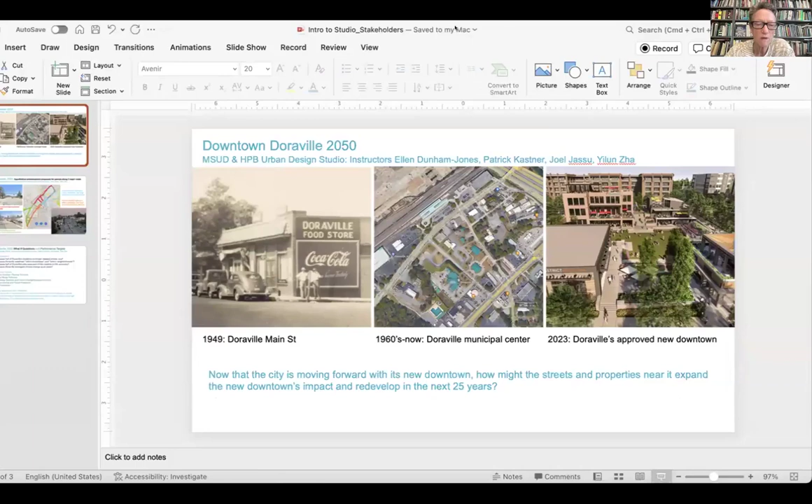We're really looking at downtown Doraville and how it's changed. And you've seen the photo before of what the old Main Street used to look like. You know what your downtown kind of looks like in the middle there now, the municipal center. And I assume all of you are familiar with the plans for the new downtown that are really much more urban, have more attention to gathering spaces, much more sustainable.

And so the question that we are really asking is, now that the city is moving forward with a new downtown, how might the streets and properties near it expand the new downtown's impact, frankly, expand its visibility? I think the new downtown plan is terrific, but it really doesn't have a presence on Buford Highway or on New Peachtree Road. You know, how might redevelopment around it in the next 25 years just further expand, improve, do all sorts of great things for Doraville.

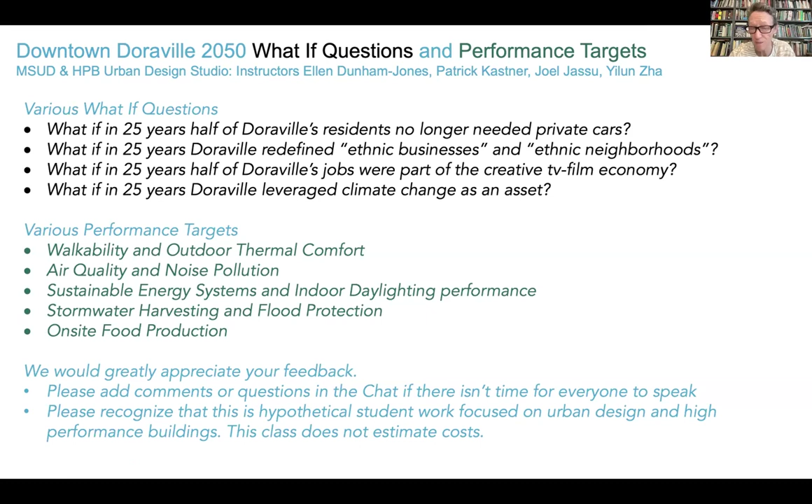This class does not estimate costs. This is not a real estate development class. The students are familiar; they've taken a class in real estate development, but in this class that's not the focus, and there just isn't time in one semester to get into all of the financial and all of the practical things. We've tried to find a balance between being bold but at the same time not unrealistic. So you'll have to let us know what you think.

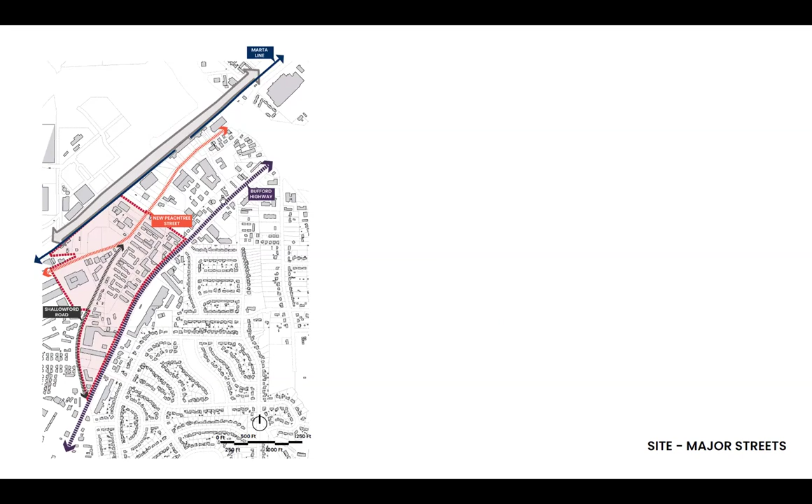Yeah, hi everyone. My name is Raj. I have Toshi and Chinmay presenting with me. So the site that we are working on is to the south of Doraville, which is the Peachtree Road. So first we identified three major streets. We have a MARTA line which goes to this site. We also have railway. So on the east we have the Buford, we have Chamblee Tucker... Shallowford and New Peachtree.

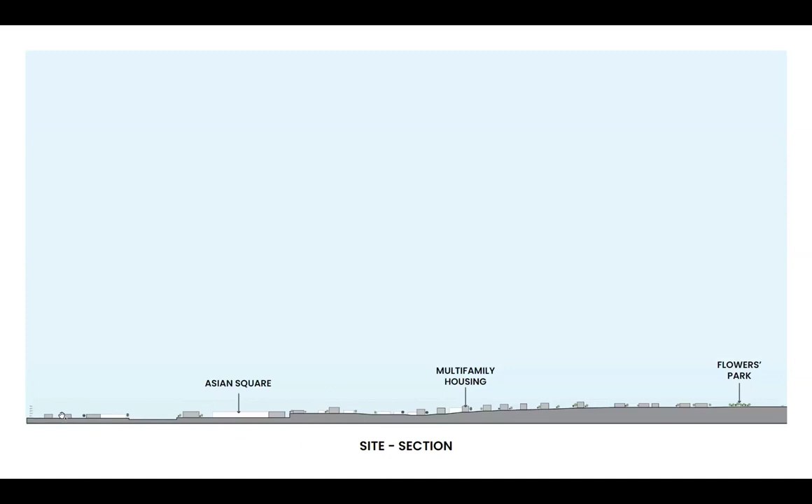We also identified important landmarks on site. That is the new downtown development, the elementary school, Asian Square. This was the site section where we realized there was a lot of topography. There's a difference of around 50 feet from Asian Square to Flowers Park. So the question that we are trying to answer is, what if in 25 years, half of Doraville's population no longer needed private cars? So we started listing how we can promote walking as a preferred mode of transportation.

Some things that we identified were better pedestrian infrastructure, a variety of mixed-use amenities to give people a reason to walk, more transportation options, green spaces, affordable housing. At the same time, some of the issues that we identified on site were that there was no connection from the Buford to the Shallowford. There were a lot of vacant lots on site, and there were no active uses or active programs on site. Also, a lot of accidents happen on site, and a lot of jaywalking happens on this side because there is no sidewalk.

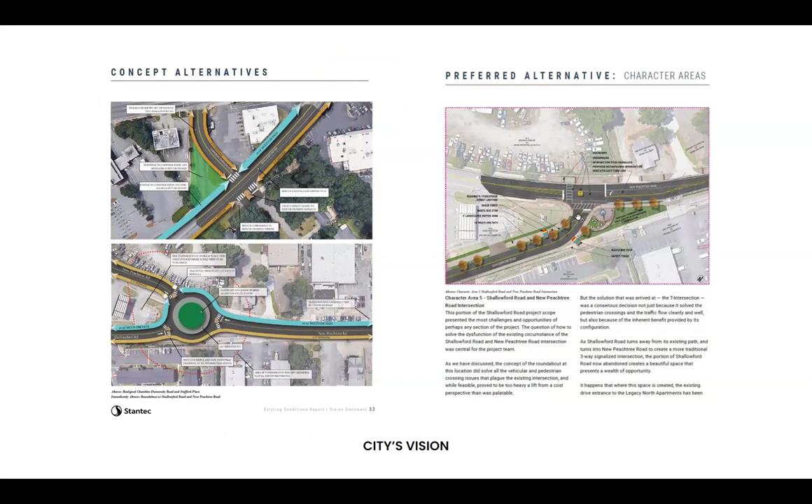And the city's vision, where the Peachtree and the Shallowford meet, I think the city is also imagining figuring out a junction as well. So to answer these questions, we started coming up with our urban design strategies. Like Raj said, we identified these three major axes on our site: Buford, Shallowford, and Peachtree. First, the strategy was to connect the axis of the Shallowford leading to the New Peachtree, connecting to the northern part, that is the MARTA station and the downtown.

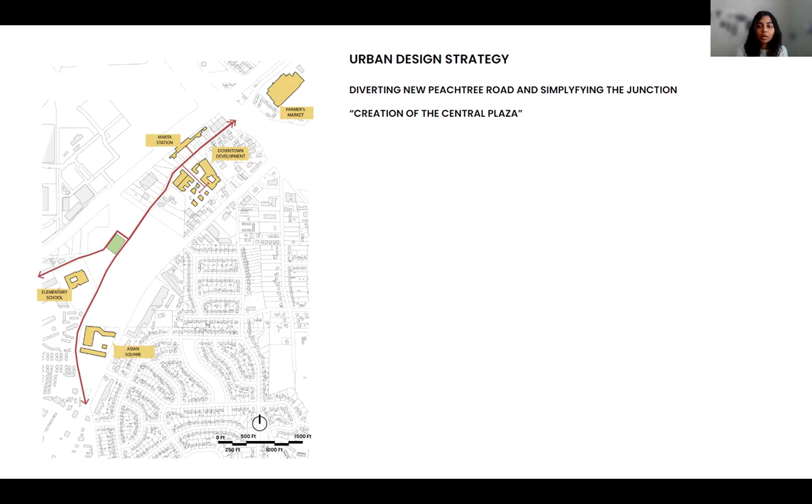The second strategy was to continue the axis of the New Peachtree. Like Raj said earlier, the junction where the New Peachtree and Shallowford meet was a complicated junction. So to simplify that, one of the strategies we came up with was diverting that axis, which led us to the creation of this central plaza, the central, highly public space for the city.

The third one was the two major public places on our site, the Asian Square and the Flowers Park. Although we know the Flowers Park is going to go away, according to the ULI they are trying to reimagine the park. So we thought it would be a great idea to have some sort of physical connection or a spine connecting these two major points of the site. And another was looking at how we can break these larger blocks and have some sort of secondary connection.

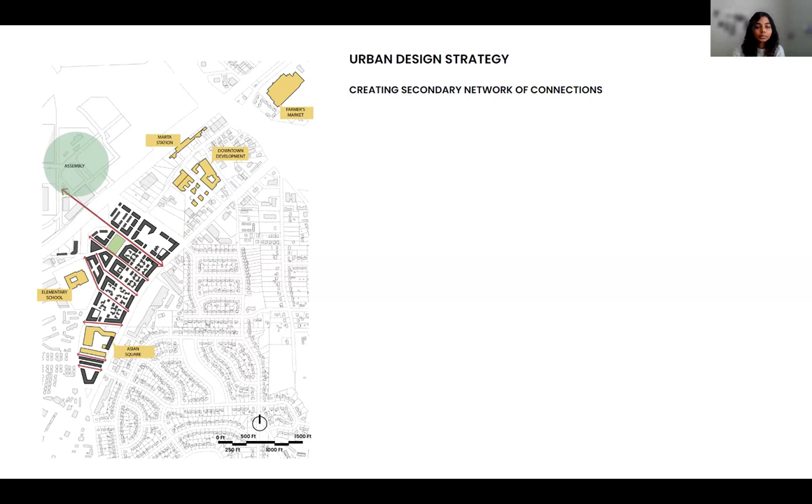Okay, you're halfway through your time. Yeah, yeah, move quickly.

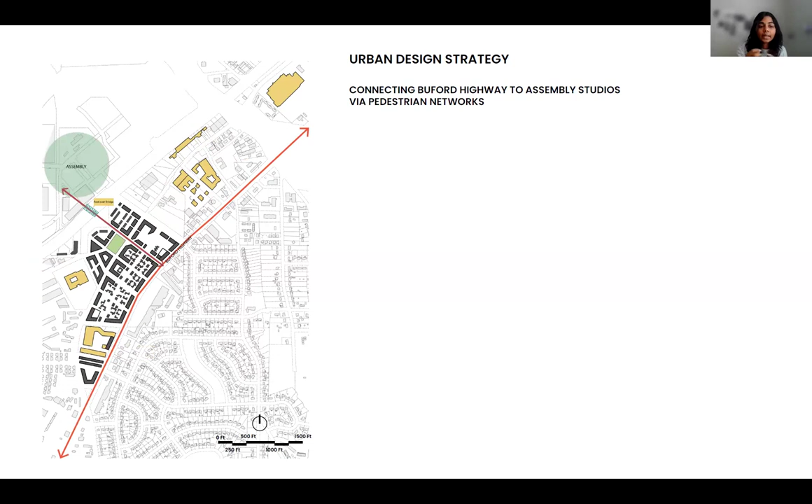So this was again how the New Peachtree could come together, and we could establish connections from the Assembly to the downtown. Another one was how we can connect Buford to the Assembly. So we thought of coming up with foot over bridges or some sort of physical connections that can extend from the site to the other part of the plot.

One of the things we were targeting was the what-if scenario after 25 years, how we can make it more car free. So after 25 years, we envisioned having autonomous pods, sort of AVs that could run on the entire site.

We established certain points where these could have stops for the public, like the gateway, the Asian Square. We also have an elementary school on the site, the central plaza, and the Flowers Park. So our autonomous vehicles and other micro mobilities can run throughout the site.

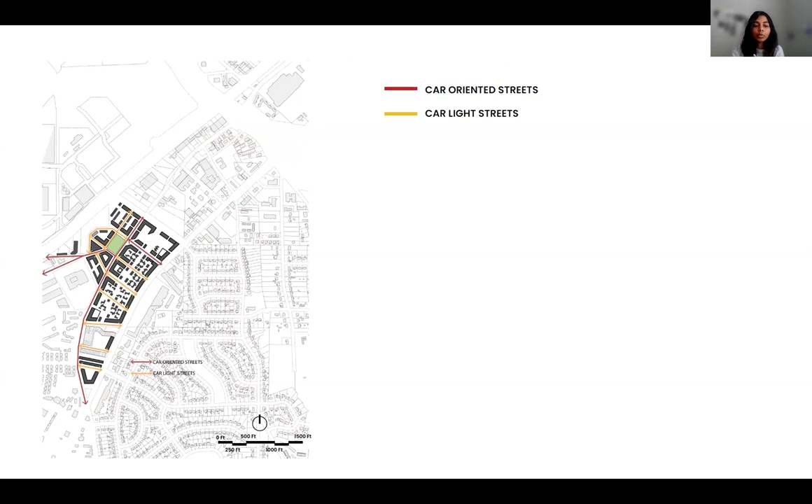We looked at how we can divide these streets into car-oriented streets, trying to limit the car-oriented ones as much as we can. One axis was Shallowford, the second was car-light streets—how we can not do away completely with cars, but have certain accesses for micro mobilities. So those could be car-light, and eventually all the other zones could become car-free zones.

This street leading from the Asian Square to the Flowers Park would be a completely car-free street. To make the pedestrian walkability more pleasurable, we thought of having a bioswale that runs along our site.

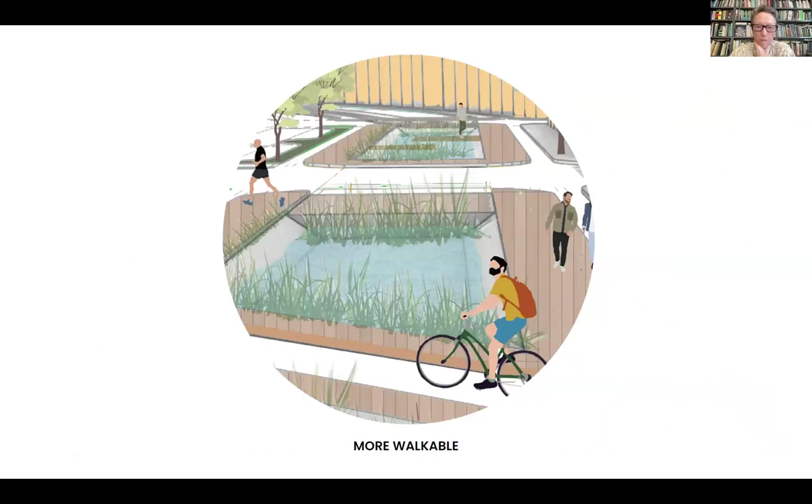We were looking at how we can make our neighborhood more walkable and bikeable, as well as more connected in terms of all these micro mobilities. This was just the land use plan, mixed use combined with single family housing, and these are all the amenities laid out on our site.

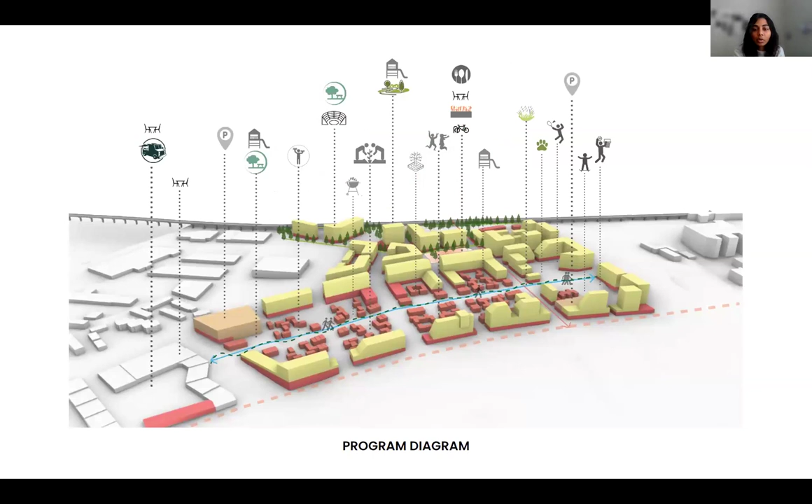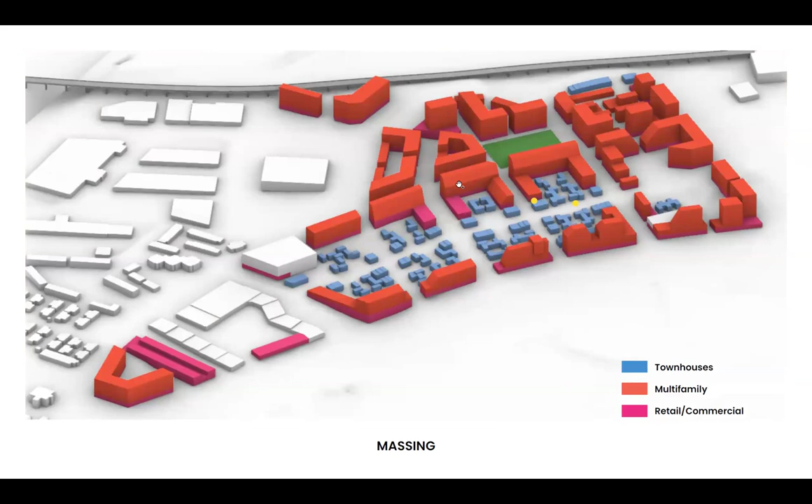We'll just run through the massing options. We have higher density on Buford and Shallowford, but lower density inside the neighborhood. We were exploring how we can emphasize the plaza that we were talking about.

I think it's important to say that your neighborhood in the middle of the block is a car-free neighborhood—no parking for those units in the middle. Let's just jump to Chiang Mai.

As we have the car-free neighborhood, one important thing is the urban heat island effect that happens due to cityscapes right now, due to all the concrete. So we moved ahead and saw how the shadow patterns are along the New Peachtree Road, let's say Buford Road, and found we can have our central plaza covered with trees.

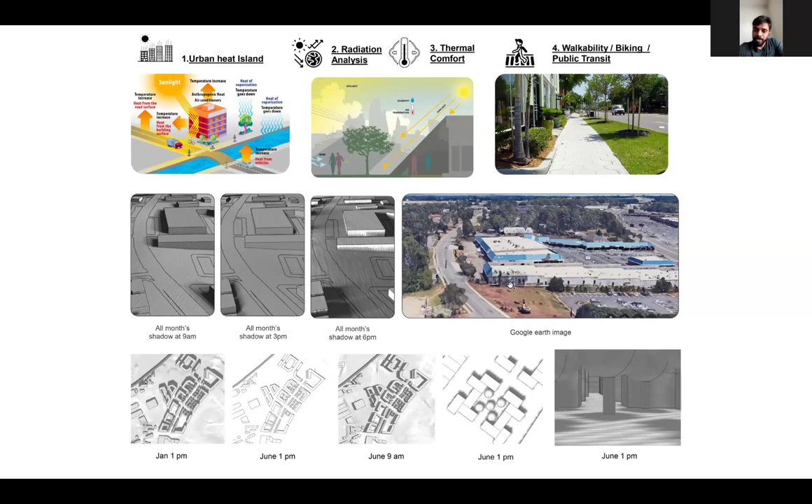We also studied the solar radiation affecting the site. These are images showing a few places on our site that are very much exposed to sun, which are not comfortable while walking, so we're trying to mitigate that with various design options coming forward soon. We also studied how internal areas or rooms are affected by sun, and both studies define our thermal comfort.

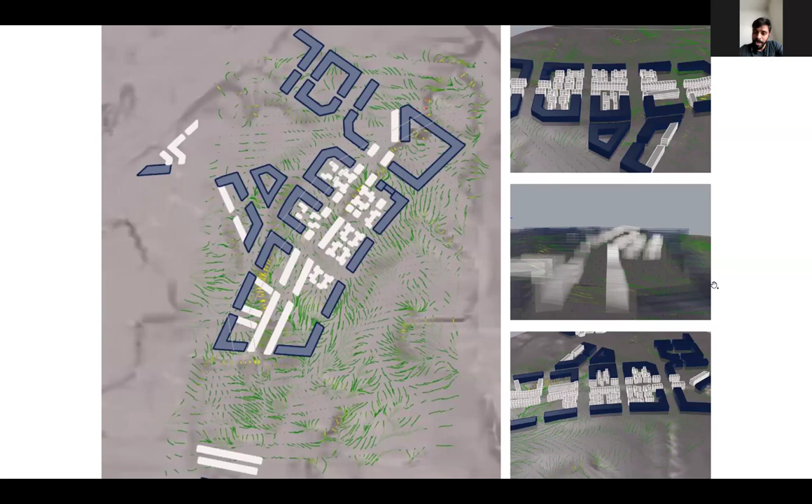Also, apart from solar energy, we are trying to use the whole topography of our site to our advantage by looking at how we can utilize the slopes for the stormwater trap, where we can store the stormwater and use it for different multiple purposes. As you can see here, we have formulated a few options and identified a few locations for the same. Thank you.

So you guys have a couple of questions for the audience. Raj, why don't you read them off, or Toshi?

The first question was: what everyday amenities and facilities do you believe are currently lacking in Doraville? And what are the key concerns and expectations of the community regarding these facilities, revolving around everyday life in Doraville? And a comment on the master plan: how do you envision the future development of Doraville, and what role do you see our project playing in that vision? Basically commenting on our master plan.

Can you imagine in 25 years whether some car-free housing would be viable? The students looked quite a lot at a project in Tempe, Arizona called Cul-de-sac. It's quite amazing how much more affordable everything becomes, and how much more you can deal with the urban heat island effect if you go car free. They didn't entirely go car free, but I think that was a really major part of what these guys were doing. So let's get some feedback.

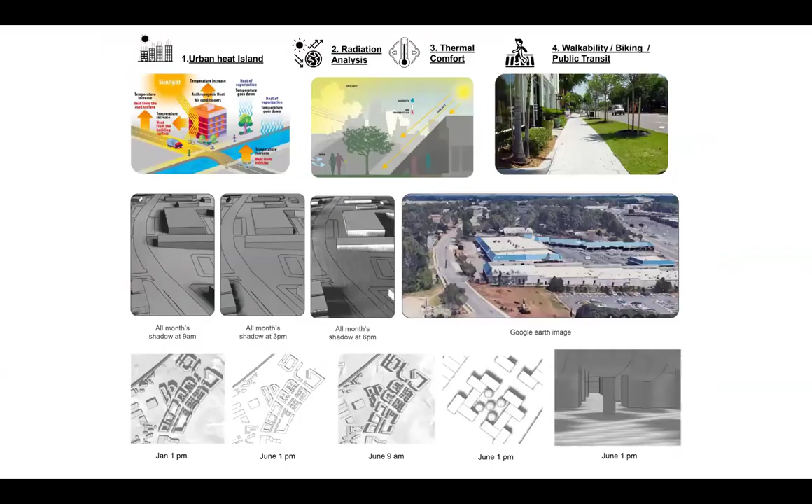Should I go to the master plan? Sure, or the questions. We'll just take questions or comments from anyone who would like. We've got about 10 minutes for questions.

I'll jump in. My name is Matthew Oppenheimer, with Halpern Enterprises. We own several of the shopping centers up and down Buford Highway, and I'm also on the board of the Chamblee-Doraville CID. Very interesting to see some of the concepts that y'all have come up with, and I'm interested to see some of the different ideas from the different groups. I think it's hard for me to imagine a car-free environment, because my vision of that area is so car heavy, particularly at the speeds the cars move on Buford Highway.

I don't have a fully formed idea on all of this, nor do I necessarily have a question, but it's an interesting idea. I think sort of having density up along Buford Highway, and then maybe having the car-free living and connectivity in the areas off of Buford Highway that are a layer or two removed, certainly makes sense.

I will say that our experience in the area is that there are quite a number of people who live there that sort of live a car-free lifestyle, if you will, walking up and down the corridor, whether on sidewalks or footpaths where there aren't sidewalks. All that to say, I think it's very interesting concepts.

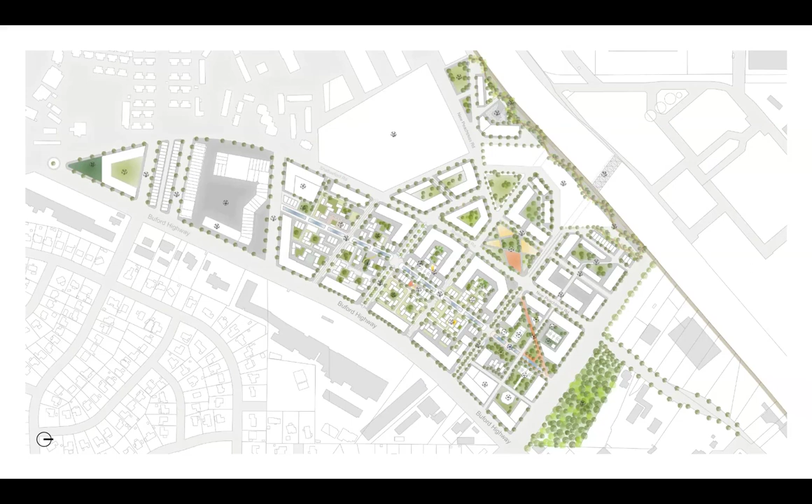I totally agree, the more trees we can have, the better off we are. Little parks and places to sit - I see Chamblee's putting in little places to sit all along New Peachtree Road with little artwork, and it's just so pleasant, even though we've got a big train going right beside it. It's just a pleasant atmosphere.

This is Sarah Bensford with Microlife. That was my takeaway in looking at this plan, is that when we were doing our walk in Doraville, the thing that really struck me is it just felt like tons of concrete. It felt like if there was green, it was hard to notice. I'm sure it was there somewhere, but just seeing the real attention to getting some green back in there in the form of street trees and little pockets of green space, I think that's a great part of this plan.

All right, well thank you very much. I am now going to ask Raj to stop sharing his screen and Omkar to share his. So this next team is working on the exact same site, that really centered on Shallowford Road, but they have a different what-if question and a different set of performance metrics.

Hello all, I'm Omkar. I have Rajat and Chinmay with me on this site. So the scenario which we were tackling is: what if in 25 years, half of Doraville's jobs were part of the creative film economy? When we talk about film economy, the first thing which comes to our mind is Assembly.

So definitely Assembly has a lot of influence on our site. But we have observed that Assembly provides spaces for the big production studios. And when we are trying to create a creative complex or creative spaces on our site, we would like to give opportunities for the smaller production houses to come and start their journey in the film industry.

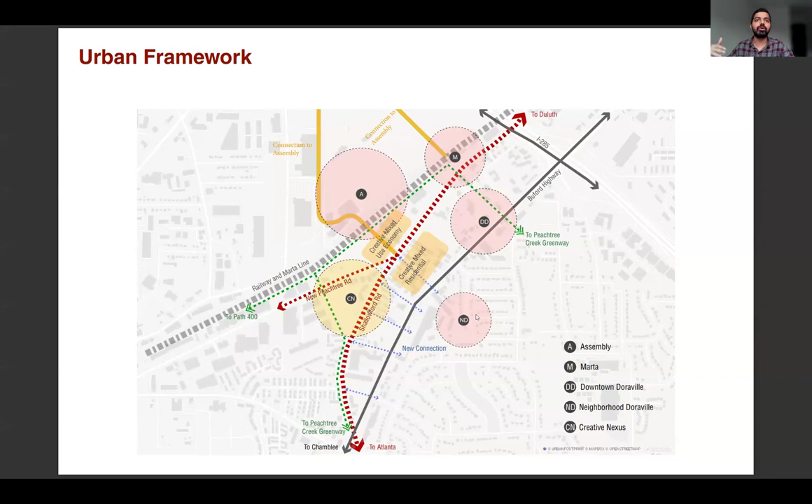So we analyzed the existing scenarios. We saw that the parcel which we are looking at has very little connectivity. So we'll try to create more connectivity through this. Connecting Buford to the Shallowford and the Peachtree will be one of the very important points. Because of that, we will connect the Northwoods to the neighborhood of Doraville.

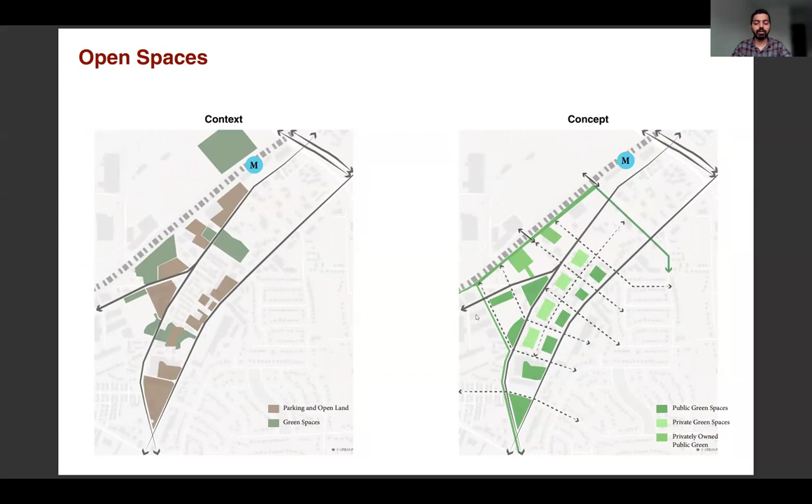We also observed the open spaces which are there, and the parking lots which are very dominant. Through our proposal, we'll try to organize these spaces so that they can have a better use. And the current land use plan or the zoning which is already there is pretty heavy. So we'll try to frame it and make it more usable for the community.

Yes, so looking at the performance metrics, we also identified two possible locations for these two performances, and these are the anaerobic digestion and the solar generation. Anaerobic digestion is basically the biofuel plant. Our idea is to take all the waste from the upcoming buildings and utilize it to generate energy. And these are the two possible locations which are just beside the railway track.

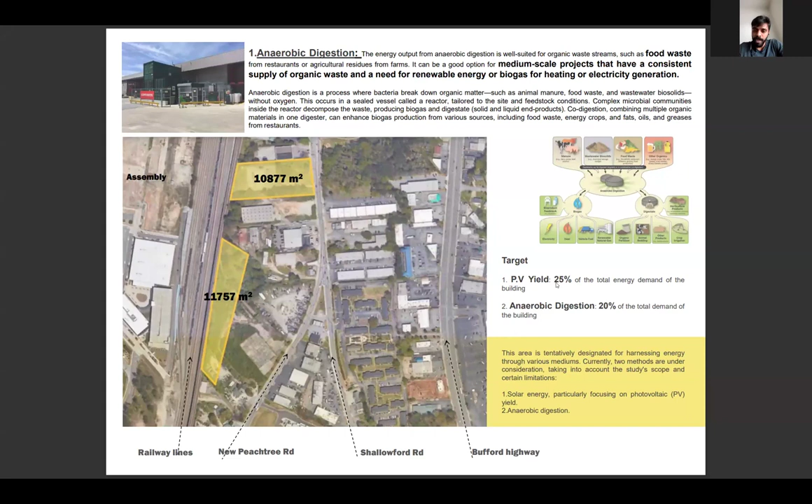Our target for the PV is 25% of the total consumption of the new buildings through the solar panels. And through anaerobic digestion, we are thinking of 20% of the energy to be generated. Next slide.

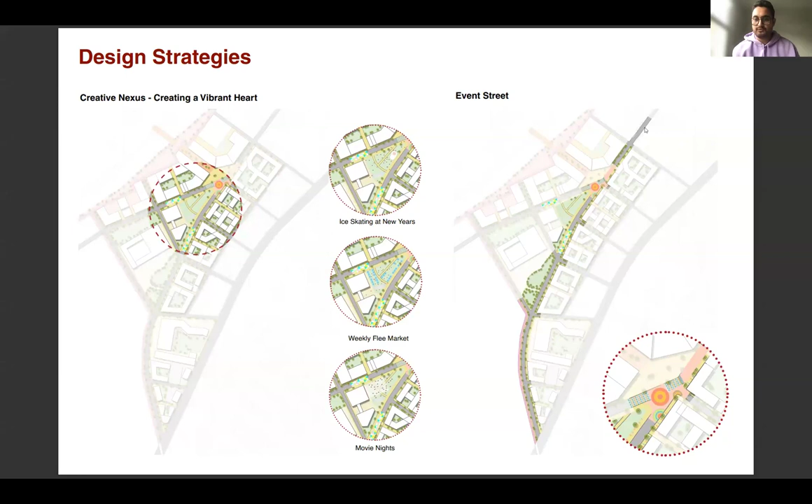We are also proposing Shallowford Street as our main event street, which will house parades and events all year round like Dragon Con and Comic Con, and which will essentially become our walk of fame, where when you are walking, you are the star.

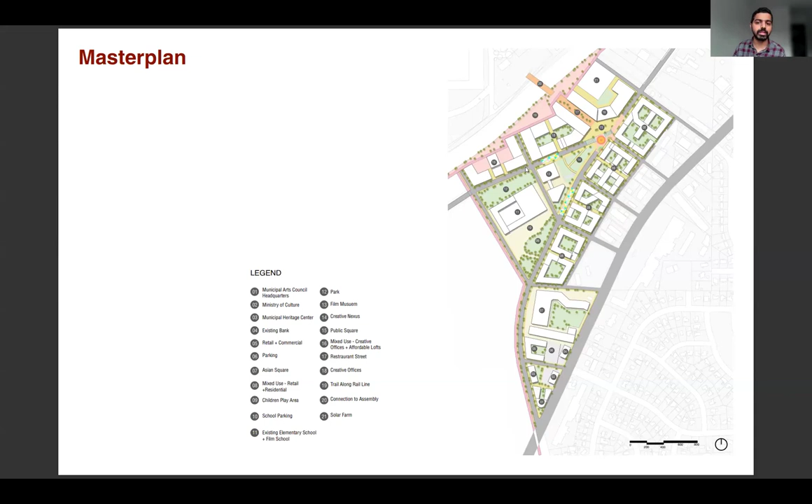All the residential spaces are zoned here along the Shallowford, and along the Peachtree we are creating this creative complex which will house offices and affordable residential apartment lofts. This is how the entire massing looks. We have put a lot of mass on Peachtree and Shallowford Street because that will give enclosure to these streets and create a safe neighborhood.

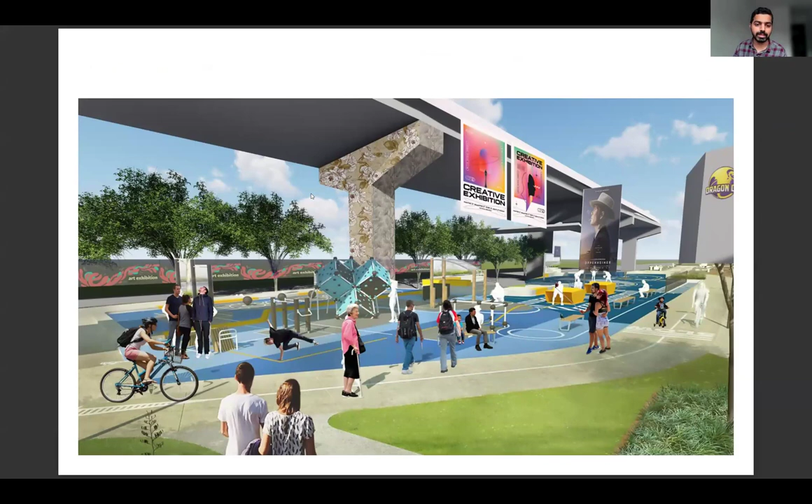These are the views we're envisioning. This is along the MARTA line, the trail we are proposing, which will have play areas in between and a complete trail for pedestrian and bicycle movement. This is our creative nexus, a central green space which will have cinema nights and flea markets.

This is how we are envisioning the event street. As Doraville has different ethnicities with their different cultures, this event street will showcase these cultures, which will invite people to come to Doraville and be a part of it.

All right, your time is up. Just wrap up real fast.

So these are some more views of the spaces and the streets. And this is our phasing plan. In phase one we create these two spaces, the creative nexus and the creative gateway, and then we'll move towards the office spaces and the residential units. Thank you.

All right. Do you guys have a question? Definitely. When we talk about creative economy, everybody has a different vision or perspective on it. We would like to hear more about your views on creative economy and how we can create more such spaces or opportunities for the people residing in Doraville and attract people from all around the city to come to Doraville and be a part of it.

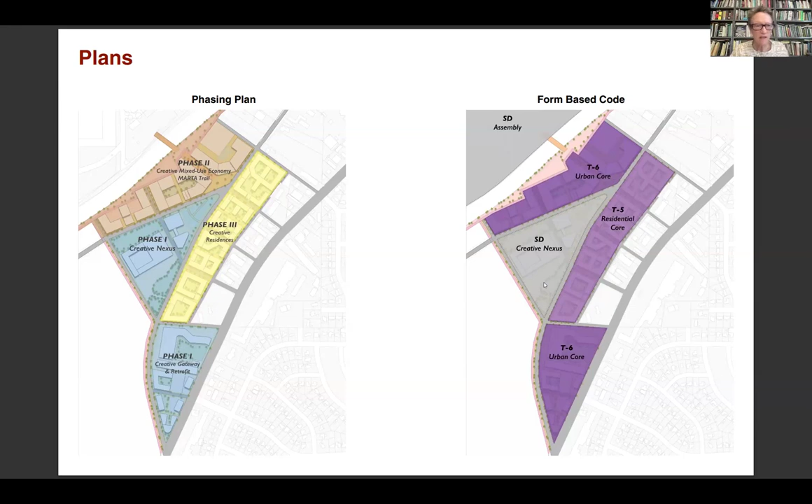Great. Why don't you go back to your master plan? Or the massing, maybe. Yep. Yeah, that's good.

Who wants to jump in? I'm sorry, what was the question again? So we are tackling the creative economy, and everybody has a different vision for creative economy. So we're trying to understand what your vision is about this creative economy.

Well, like any of the other city hubs like Decatur or whoever, walkability of things that interest the multitudes. In other words, boutique shops and art galleries and, you know, piano teachers, and it's just a whole conundrum of different things because we have a very eclectic community here.

And more advertising and opportunities for everybody to know about all of the foods that are available. I mean, I don't know the name of it, but we've got a new ice cream place that is absolutely to die for, but it's stuck back in a shopping center, and unless someone tells you about it, you don't know about it. Okay, yeah.

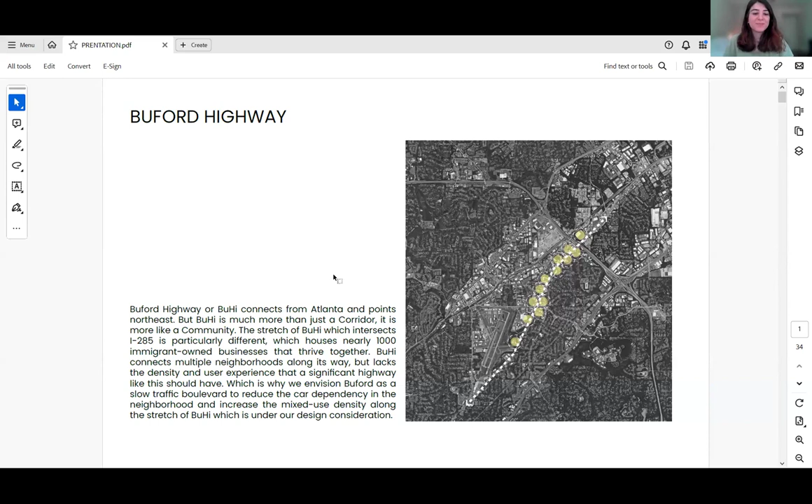Hello, my name is Alham, and we looked at the north part of Buford Highway. Our vision, our what if, is: what if in 25 years, half of Doraville residents no longer need private cars? So we went through our site and identified some issues that we can address toward being more car-light, car-free. The first issue we identified is that the residential neighborhoods around Buford Highway are disconnected, and Buford Highway and the interstate highway are cutting through Doraville.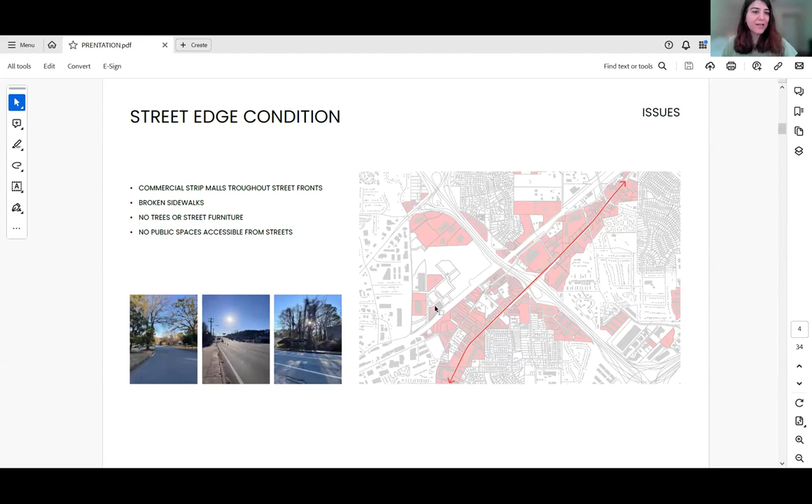The other issue we noticed is that although all the parcels along Buford Highway have commercials and ethnic restaurants, there are no good sidewalks. They're broken, not enough trees to cast shade, and no public space where you can rest. The other issue we noticed is that there's not enough density. It's scattered, different sizes of parcels, different sizes of buildings, and the majority of parcels are parking.

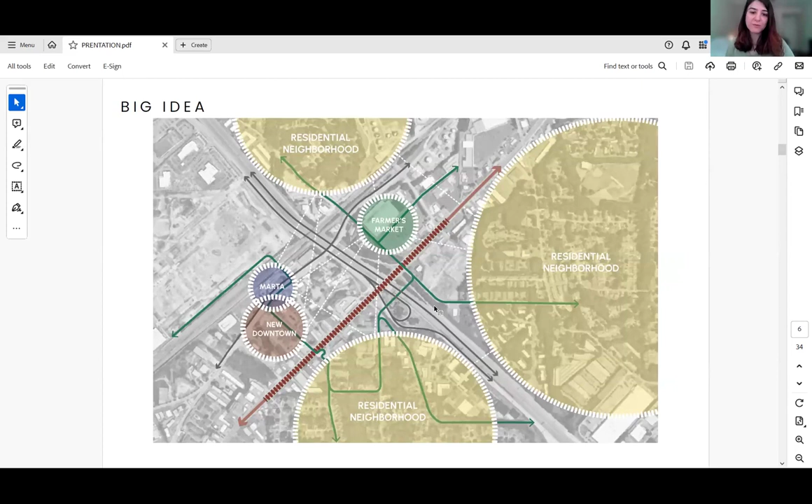So our big idea is how we can think about Buford Highway as a connector, as a spine, connecting all these residential neighborhoods together to the Farmers Market, the new downtown, and MARTA. So we went through the opportunities we found in our site. Our imagination of Buford Highway in 25 years, aligned with being more car-light, car-free, was to retrofit Buford Highway into a slow traffic boulevard, extending street networks toward the neighborhoods and reducing the speed of cars, at least in this part of Buford Highway.

Another opportunity we looked at was to extend the Peachtree Creek Greenway that is already proposed to pass through our site, connecting to downtown and MARTA. So we were thinking, what if we extend this greenway as a pedestrian, bikeable way to connect all these neighborhoods around Buford Highway and extend this green network of pedestrian ways through the neighborhoods.

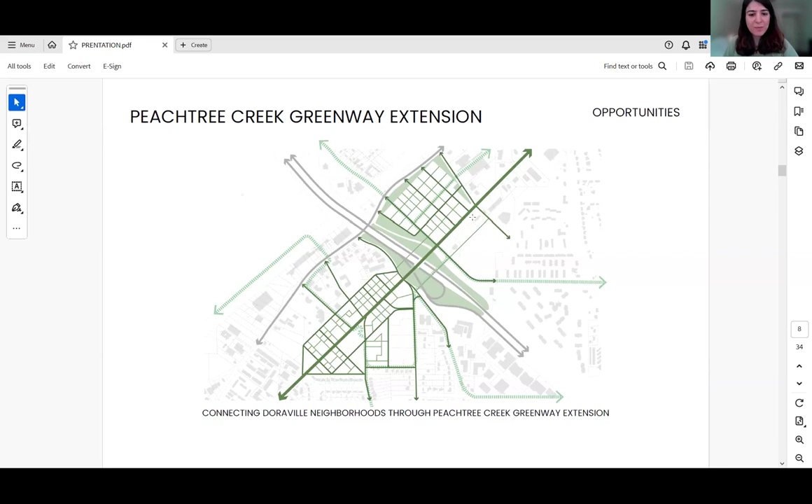And the other opportunity that we looked at is to add more density toward Buford Highway, to propose more mixed-use development and commercial developments, activating the highway frontage zones, and to give more density to the neighborhood.

So our urban framework came out like this: to see Buford Highway as a boulevard, green, slow traffic, and to extend this green network of bikeable, pedestrian-friendly streets toward the neighborhood, and more density.

Here, I'm going to mention that as we are looking through this what-if, more than half of Doraville residents don't need a private car anymore. We looked at parking potentials around our site, and our argument is that we are not going to provide huge parking lots anymore, probably stacked parking somewhere on our site, but we are proposing car-light, car-free.

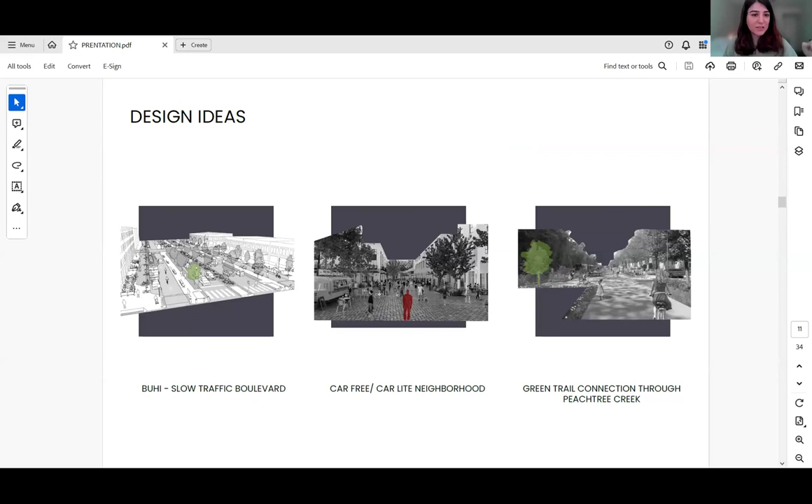Minutes left. Yeah, I'm going to just cut it.

Our inspiration was this superblock idea: keep cars out of the blocks, and the inside of the neighborhood would be more pedestrian and car-light.

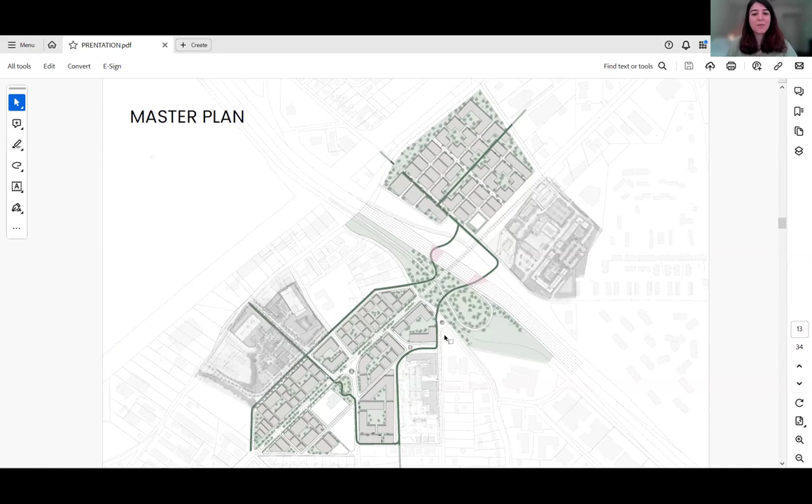The urban framework and the major move of proposing Buford Highway as a slow traffic boulevard. We've developed 3 street types.

Next. 1 minute. Yeah. Next.

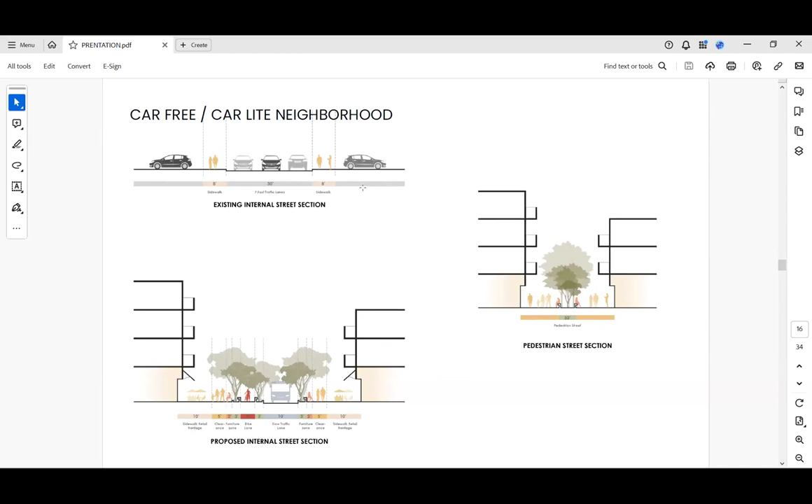So this is how we're imagining Buford to be: more people, more life, more public space, and fewer cars. Next. The second street type that we're planning are the internal streets, which again have more retail spill-out, more pedestrian area than for cars. And the third street is completely pedestrian.

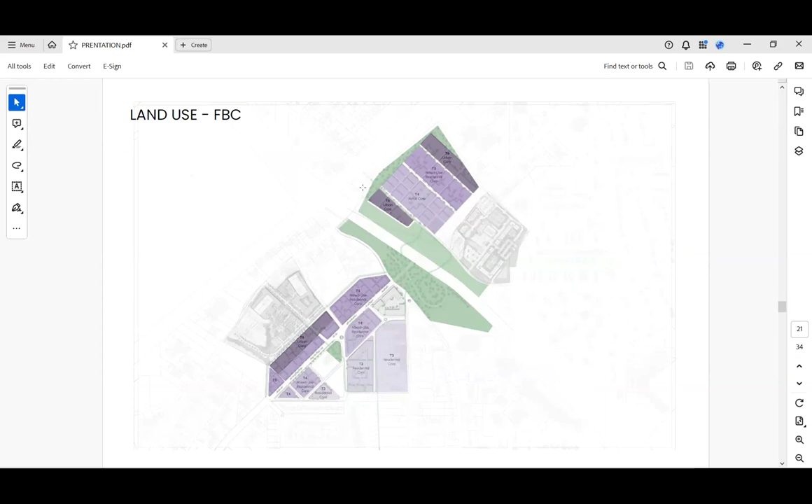And this is the land use that we plan on executing, where T6, the most urban, and the areas where the buildings would be higher, are near the downtown and near the highways. The rest are either T4 or T5, and T3 is only where there are already smaller areas of development and low in height. Next.

Shruti. You're out of time. You got to give Shruti a minute or two here.

Yeah, hi. So, next slide.

I tried to put together some goals for this particular site in terms of strategies, which were to understand urban thermal comfort, walkability, and air quality. One, because if we want it to be walkable, we want the streets to be comfortable, the temperature should be comfortable for one to walk. And air quality, because around Buford Highway it's really polluted. So as a team, we were trying to study how to reduce that, so it's a better experience for a user to walk.

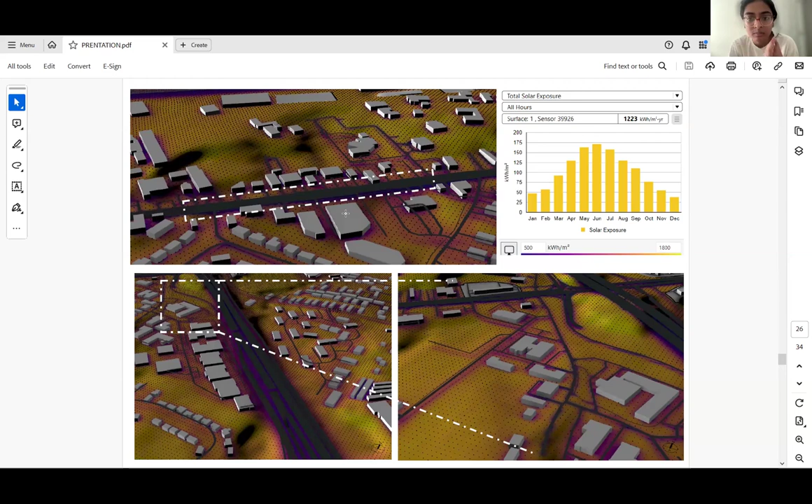After our design, because of this massing, we were trying to naturally shade those pathways, as you can see the gray patches around the site. So we actually got some amount of thermal comfort without adding trees and landscape, just because of the density that we created. I believe it will be more comfortable, and we can get the numbers much lower once we add vegetation to the site.

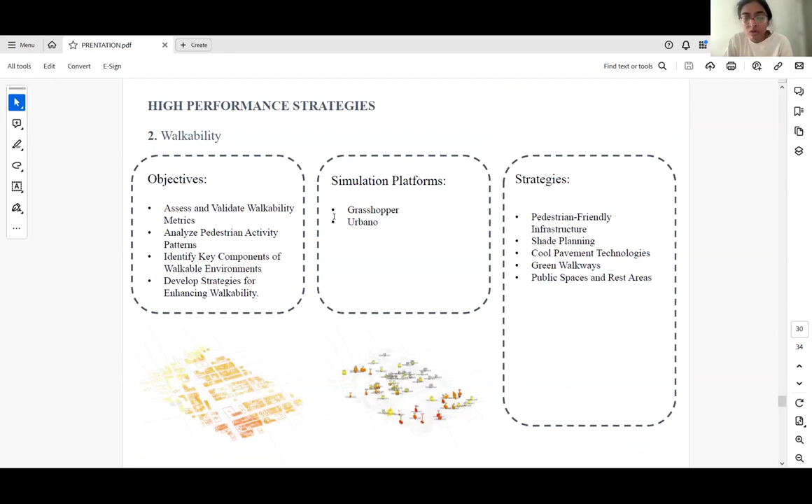Second was walkability. Currently, because the residential area is not as much around the site, it's mostly amenities, so the walking time to different amenities is a lot, and people don't use the street for walking for the same reason. So what we're trying to do is add more residential spaces, so the commute to the amenity area is reduced, and people don't use the car, they can actually walk. This is just the existing analysis as to how low the walk score is - as you can see, the numbers are really low, 21 or 0 in this case.

Okay, so final questions for you guys that you have for the community - do you want to read them aloud, Shruti? You've got the floor.

My question - that's interesting, because I wanted to know, now that we're planning to add more residential spaces, there might be some spaces existing in Doraville where you have amenities closer to the residential spaces. So do the residents prefer walking, or still, even for shorter distances, do we prefer taking cars out there, and why?

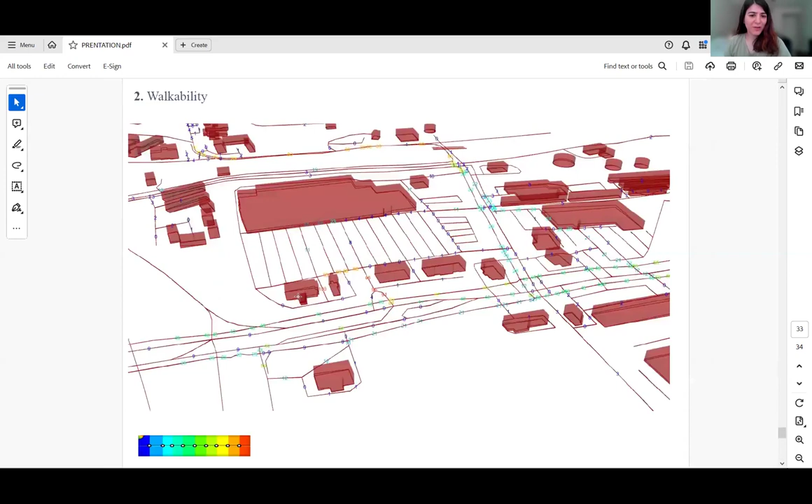So what happens to the farmers market in this situation? We kind of think about the farmers market - I'm going to show this.

I have a question. I would like to know the income levels needed to sustain this, because it's a nice community, but people have to have jobs to sustain being there. And with that being said, is that going to also create income to live in the same space you work in, so you can make a community like that work? Or is this going to be all outside money coming into this community?

I don't think we have an answer on that, but yes, there certainly are - we know that new construction is expensive. And I think part of what, as I said at the outset, we're not costing things out, but we do know that lower rise buildings can actually be quite more affordable. And if you are not providing parking and cars, that goes a long way to actually helping.

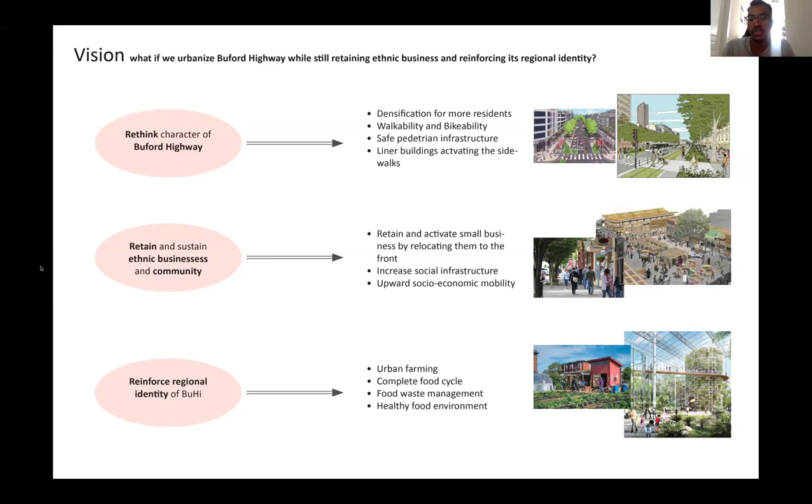So moving on, some of the challenges we face are really low density, a lot of parking lots, and the way the parcels are set up right now. The way we're trying to attack each one of these issues is by taking in feedback from when we talk to you guys, as well as some things we noticed when analyzing the site.

Buford Highway sort of acts as a moat, and it disconnects the two different sides. Cars are going through really fast. It's a really popular bus line, but it's very hard to get on those buses because of how fast the cars are moving and how dangerous it is for traffic. So we're adding more connections, making it a lot more safe, and maybe using some of these empty parking lots as part of the connectors.

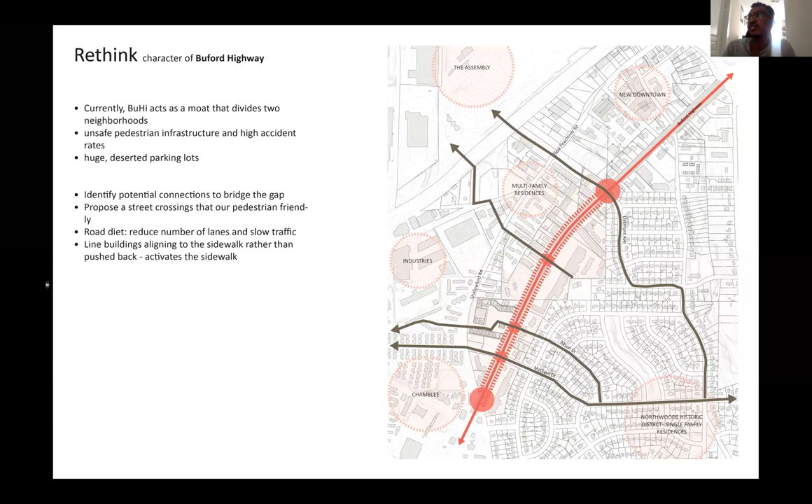Retaining what we can - that includes things like Asian Square, which are individual condominiums, so retaining that sort of space, and building on top of the ethnic community centers that are already there, things like CPACS, which is for the Pan-Asian community, but also adding a community center maybe for the Hispanic community, also adding a stormwater park, and just a park in general that people can organize themselves at and have community events.

And finally, reinforcing the regional draw that already exists there, while adding in things like a green trail that goes around our site and connects to the Peachtree Creek Trail. That gives another option for pedestrians to walk around. And as you're walking around, you can see the urban farms that give back to the retail and residential people in the area.

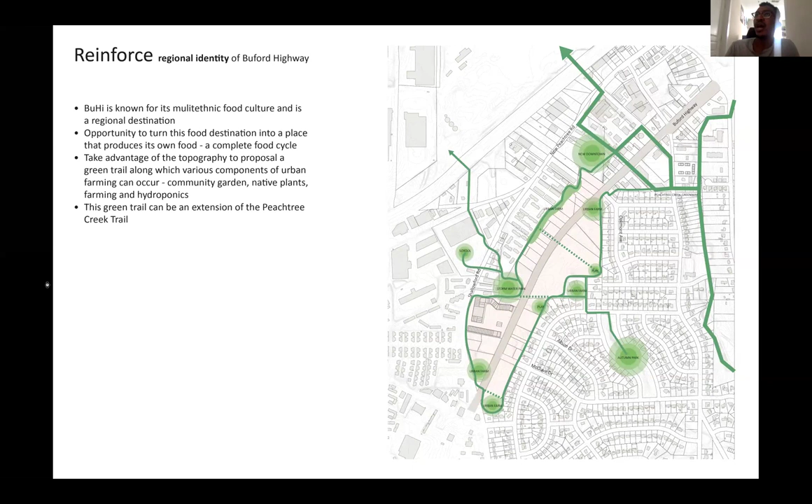So with all those coming together, you can kind of see our urban framework, which densifies the area, adds more connections, makes it a lot more green, and builds on the community centers that we're trying to implement into the site.

So one of the things that comes with that is sort of a road diet on the highway, because the way it exists now, there are huge empty parking lots, and it's really designed for cars. There's very fast, through traffic on Buford Highway, and it's very hard to feel like a pedestrian or any type of mobility besides cars.

So what we would implement is cutting it down from the 7 lanes it is currently to 4 lanes, which would hopefully slow down traffic. A median in the middle to help with pedestrian walkways, adding a bike lane, adding a dedicated bus lane because it's such a highly popular bus route, and having retail pushed up from behind the parking lots to the front, so you can have things like people sitting out at the retail places, and it's easier to get around from place to place, and a lot more density can be brought into the area while not having to think about parking as much, even though that's something we have thought about, which will come into play later.

Some of the phasing that we've been thinking about as we implement this: you have your existing conditions, then you build on the side of the street, and you relocate the ethnic businesses that are in Buford Highway into those buildings. Then that gives you the opportunity to build on top of that, demolish what's behind it, and continue densifying, adding more retail and residential, in different forms. And that's how we would phase it.

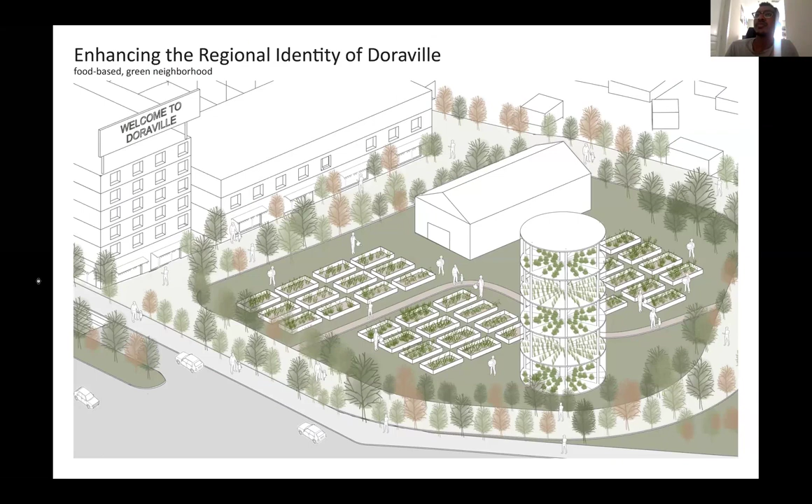Our performance targets were outdoor thermal comfort, rainwater harvesting, fresh produce generation, and walk score. Going through this pretty quickly, you can see that the existing condition is pretty bad for thermal comfort. When you add in these denser buildings that add more shade, and a lot more trees, all this shading makes it a lot more comfortable to be outside.

There's a lot more local food production. We actually were able to get 83% of local food production at our urban farming, as well as creating many jobs to maintain some of these roof gardens and community urban farms.

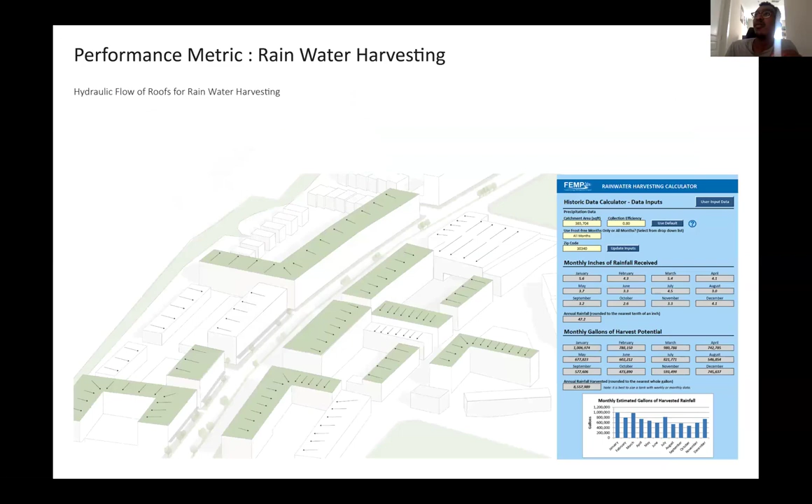And that actually reduces the water consumption by 21% by using a lot of the rainwater harvesting systems that we plan to implement. And finally, the walk score currently is a 30, and with our new design, we are able to get it to a 75 because of how many different connections there are, adding a lot more amenities and making it easier to get around. So yeah, that's our proposal. And if you have any questions, let me know.

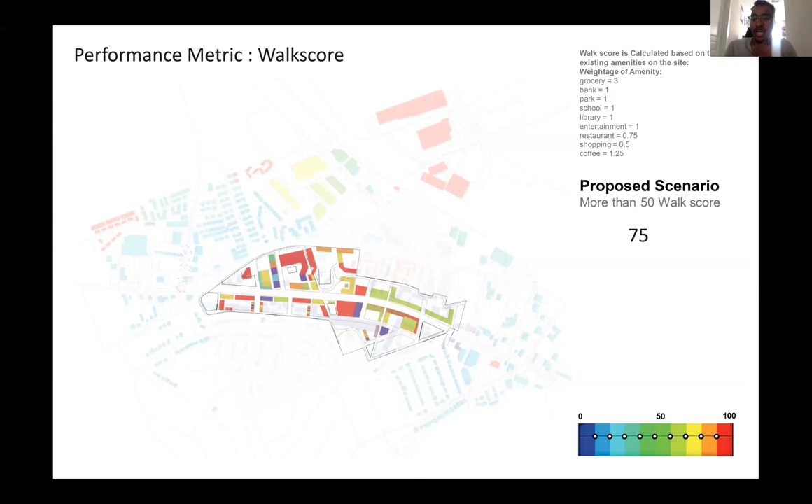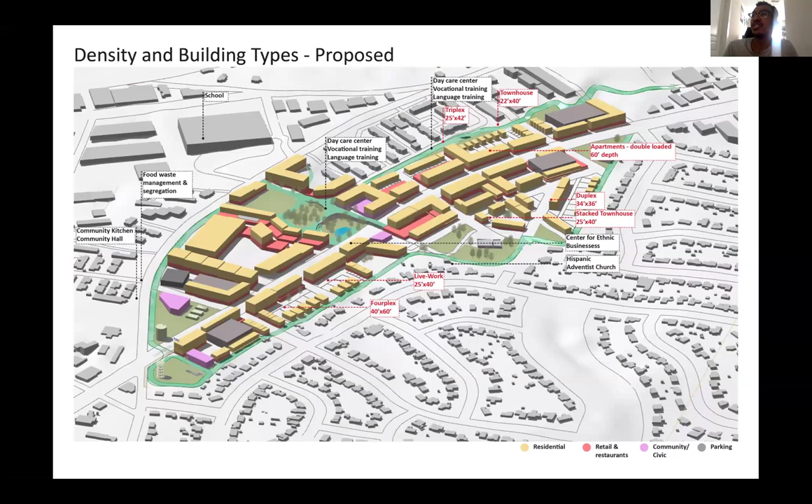I think one of the things that we talked about a lot in our academic review is the connection between the Northwoods district and our site, basically. So when you look at the master plan, sorry, just going back real quick. Yeah, when you look at the master plan, I don't want to say encroaches, but you can see a lot of the buildings that are on that side.

The backs become a lot more public with the green trail right next to it, as well as connecting to the public park and the community centers like the Hispanic Church and the Center for Ethnic Businesses. So I guess just thinking about things we should keep in mind when we're looking at the intersection between the public and the private space is one of the questions I had. So, all right, great.

And I'll just say that one of K-Bar's teammates is not here because of being made a finalist in a really important, big deal competition out in Seattle right now. So, great job, K-Bar, presenting.

Questions and comments. I mean, the connection to Northwoods. What about the Green Trail? I certainly like the way you layered it out and paid attention to the topographical maps and even added some jobs to be created in the community. I think that's important to keep workers in that area close by.

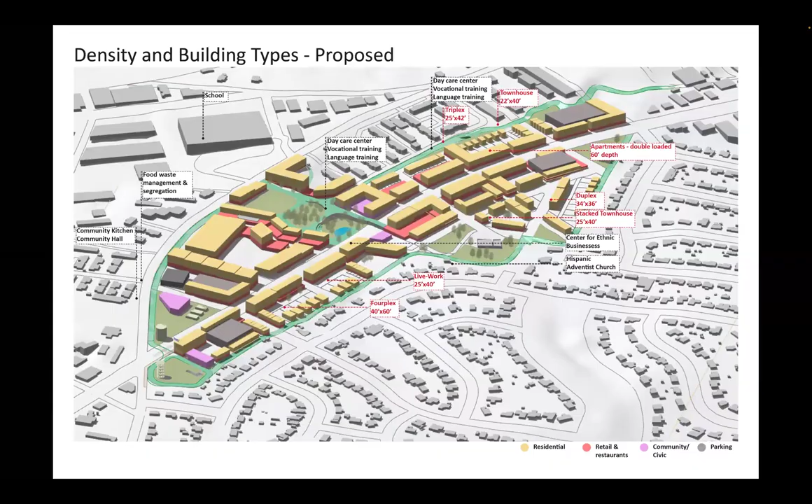Yeah, that might be something we'll have to think about as well, because as we did the academic review, we were told this might be a little ambitious, cutting down 7 lanes of traffic to 4 lanes for the speed and number of daily trips that go down Buford Highway. So we'll have to work with that in mind.

This is the second one of these that has looked at an alternative future for Buford Highway. I know ULI has studied this on more than one occasion. I haven't looked at that report in a couple of years, but is that informing at all what you've got here? Mm-hmm. Yeah, we read it at the beginning of the class. That was one of the things we looked at. We haven't implemented anything directly from there. This is more just a road diet concept that has been applied to a lot of different streets. One of the ones we looked at was Lancaster Boulevard that Ellen recommended, but not from that specific ULI study, no. Got it.

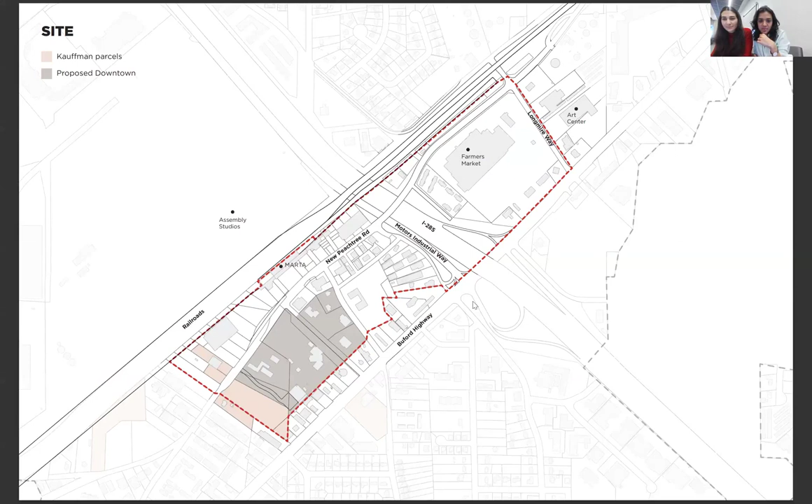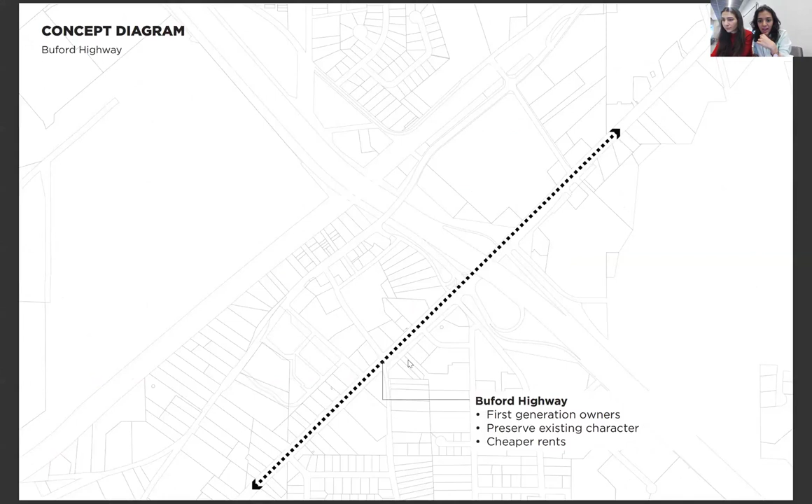So this is our site. Here is the new downtown proposed, and we are looking mainly at Peachtree. This is the topography on site, and there is a steep ridge that's going along this section. Our concept is that we would want to retain the first generation immigrant owners on Buford Highway who have these amazing restaurants. And we want to create a new main street, which is the New Peachtree Road. And this would be for retaining the second generation of immigrants. And this street would probably be much higher in rent as compared to Buford Highway.

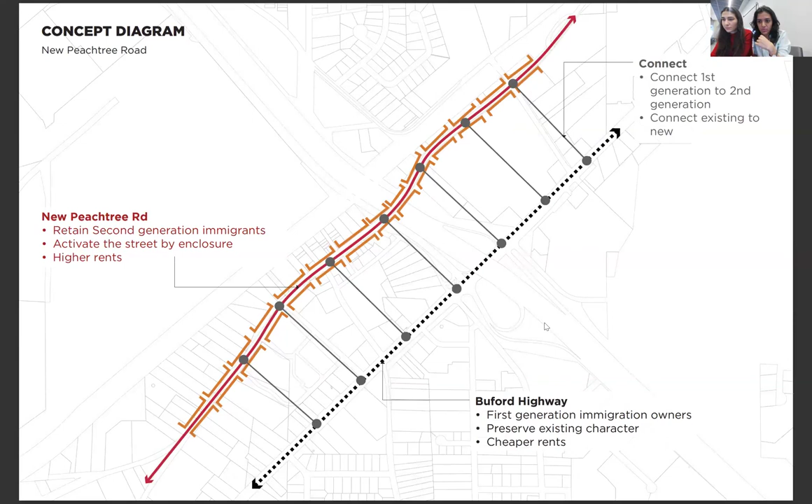The way we want to do this is align a lot of new programs along Peachtree and activate it with a lot of active frontages. And this is how we would want to connect both of these streets. These show the important points, which are MARTA, downtown, the Farmers Market, which is a regional destination, and the art center. And the orange line is the pedestrian connection that would go through these.

Our strategy to secure the ethnic character is to enrich the area with uses that respond to the ethnic neighborhoods. The program that we are proposing is to introduce new entrepreneurships like laundromats, barber shops, and daycare in order to attract new economy. To introduce arts-related uses like galleries and music instrument shops in order to emphasize the culture, and additional uses like co-working spaces, parks, and football fields in order to enhance the society and to bring the community together.

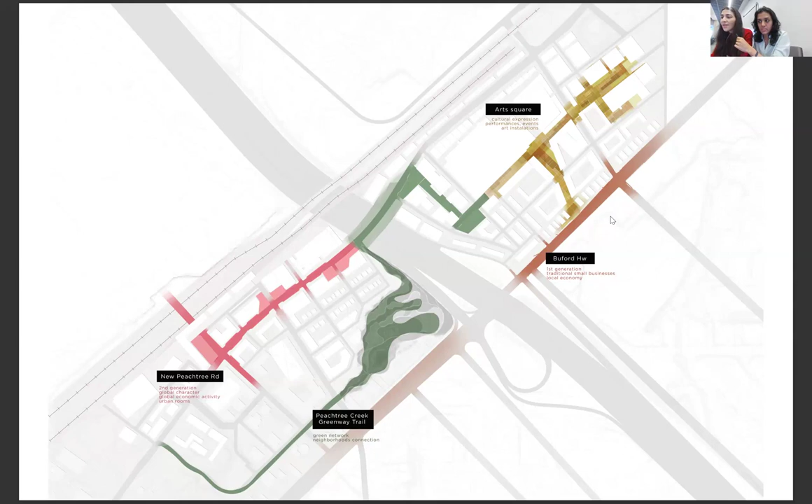Moving to the design, we are proposing networks that will connect the different characters in the area. The purpose of New Peachtree Road is to connect MARTA with downtown and the assembly studios on the other side. The New Peachtree Road will hold the character of new economy and growth, and we aim to extend this character to the east side of I-285. The green path is the element that connects the two sides around the expressway, and it's extending the creek trail through the whole length of our site. And we also aim to insert Buford Highway's character of first generation ethnic businesses to meet the farmers market, and then extend it towards the existing arts and entertainment center, to meet the culture's expression.

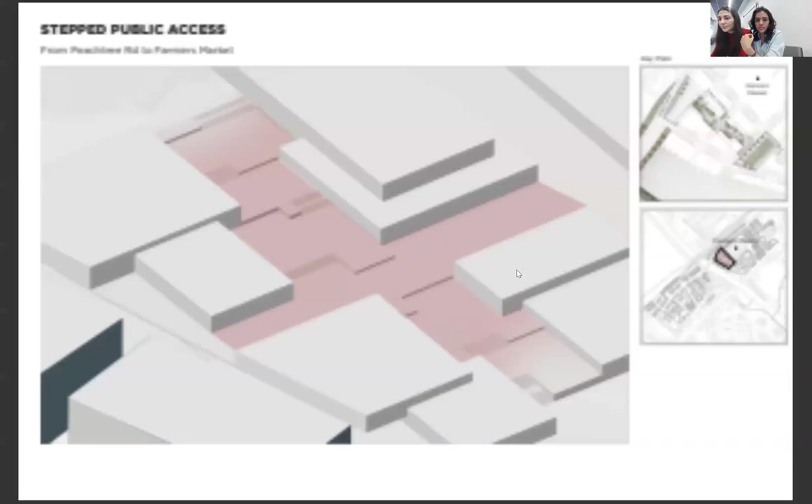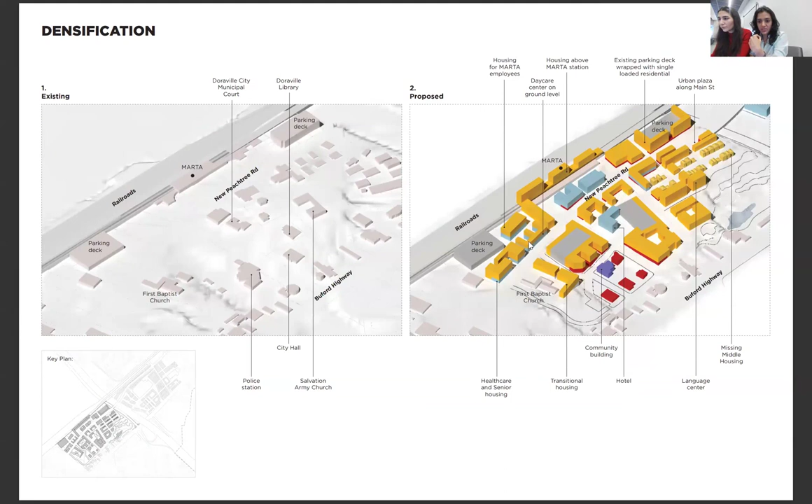This is a before and after of the densification. You see these buildings are the new buildings of the proposed downtown. We want to propose housing on top of MARTA, some housing for MARTA employees, as well as senior housing, daycare centers, healthcare centers. This parking deck, which is existing, can be wrapped around with housing.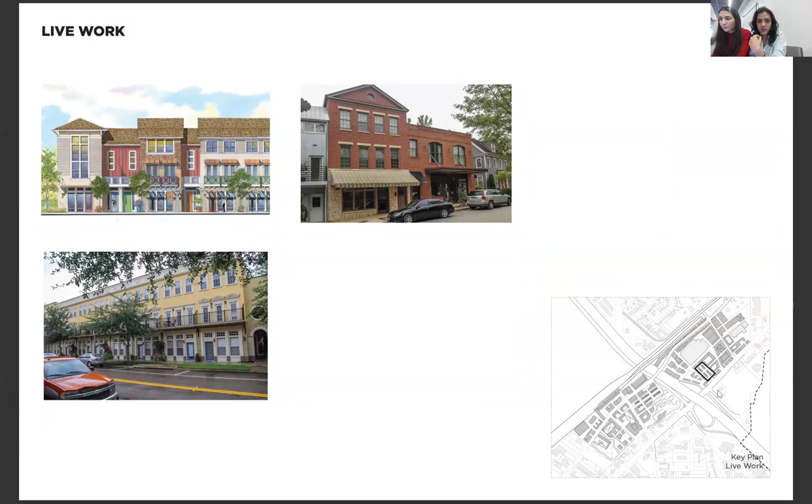This is how trees can be extremely effective in dealing with noise pollution. We did a simulation of this park for noise pollution. You can see here it's before adding trees. The levels are in red, which is really high levels of noise because of the highway right next to it. And once we make that into a green space, the noise levels reduce by more than half.

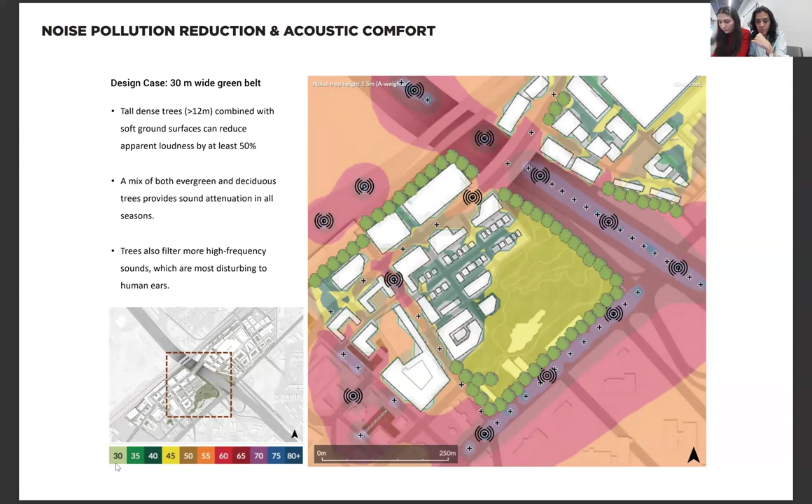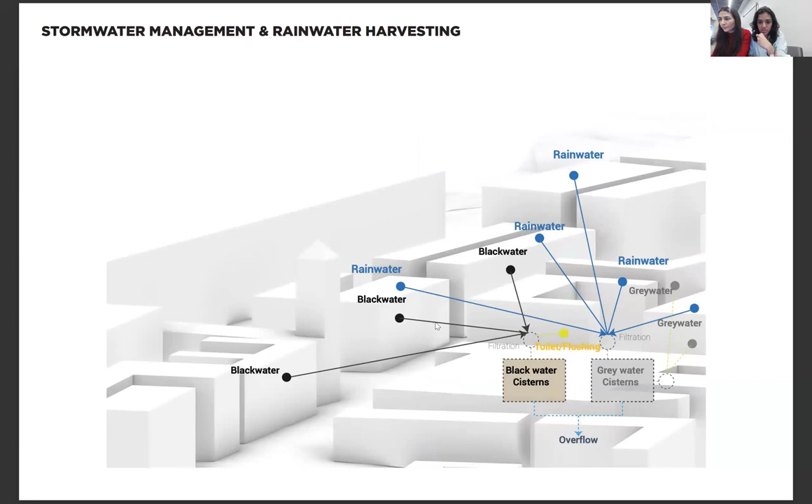And these are some of the questions that we have for our plan. We are proposing a lot of retail along Peachtree to attract new growth, so what exactly is the kind of retail that you would want to see? Secondly, we have a lot of residential proposed. So what is the typology of housing? Bigger units, small units, more multifamily that you would want to see?

Similarly, one of the main things is to highlight the ethnic businesses, because that is the main attractor to Doraville. So what programs or functions do you think should be included to retain those ethnic businesses in Doraville? All right. So we've got about 8 minutes for some questions and comments, answers to their questions.

I got a question. Your retention for stormwater, what's the 100-year flood plain on that, the depths and the overflow into streams after the filtration?

No, we haven't yet simulated that part. Okay, that's very important when putting in retention ponds. You've got to think about that. Over here at Assembly, they did a lot of work on that.

With one of our retention areas, that is also a wet stage or an aqua stage where they can actually pull the water out. The water never goes into natural areas. It's stored in utilities we have underground so that they can build sets and reflood it using the same water.

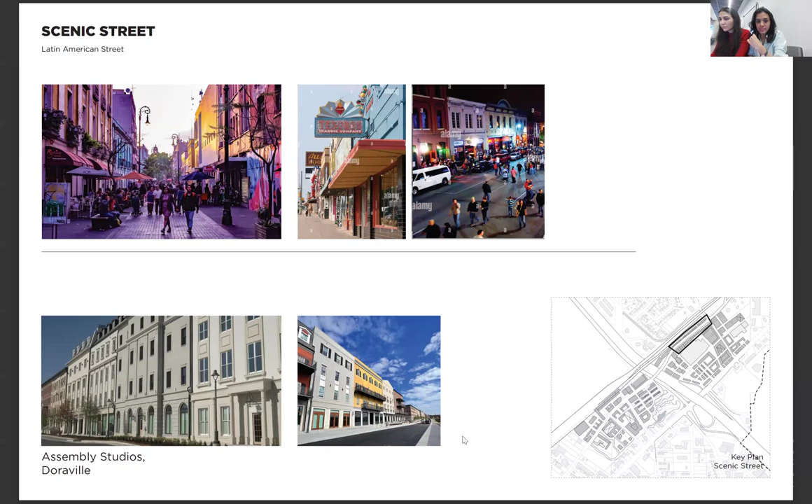Could you all go to the MARTA Plaza? I thought that was a reference image for it. Yeah, just a reference image.

So one thing I just enjoyed with all of your presentations: walking is not seen as an experience, and we need to make it an experience. And I appreciated what each of the groups have done. But again, how can we show that it's okay and actually make it feel good when you're able to connect from one street to the next just by walking?

And I think having something like this gives people the excuse to say, you know what, I don't want to get in a car. I'm going to take transit because I know Doraville has this amazing pedestrian-friendly atmosphere and allows me to connect to the community. So kudos. I really enjoyed your storyline and the visuals, and how you put the different labeling, especially for this slide, helping people see what could be possible. So thank you.

And that is a great idea, to make a MARTA station a transfer point to a site, things that you can go do, activities, like Five Points Station used to be. People would take the train just to go there and spend the entire night. If you make something like that around Doraville, they'll do the same thing. It's basically a destination.

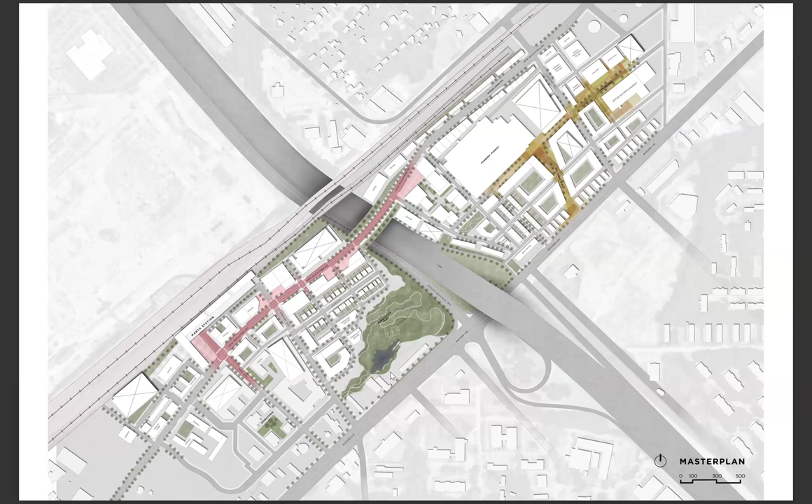All right, great feedback.

We have one last team. I'm trying to keep us true to our time, but we might run a teeny bit over. I'm going to ask Sanjana and Eventhia to close out. The last team is working on the same site but looking at climate change as an asset. None of the team members could be here today—two of them are off at a big competition right now—so I am going to play the video. Welcome to Doraville if they utilize climate change as an asset. This is Grace, Noah, and Nisarg.

Our proposal is on the part of the site that includes the Buford Farmers Market to the right and I-285 bisecting almost in the center of the site. We also have the new downtown plan on the left-hand side of the site, and a few Kaufman properties that we cannot touch. We also have the Doraville MARTA station to the north.

When we first looked at the site, there were a few main things we were looking at. The first being 3 zones: the blue zone being a multi-ethnic, multi-income community around the Buford Farmers Market; the red zone being a multi-typology mixed-use community in direct downtown support; and the orange zone being a MARTA Gold Line destination in support of the MARTA station.

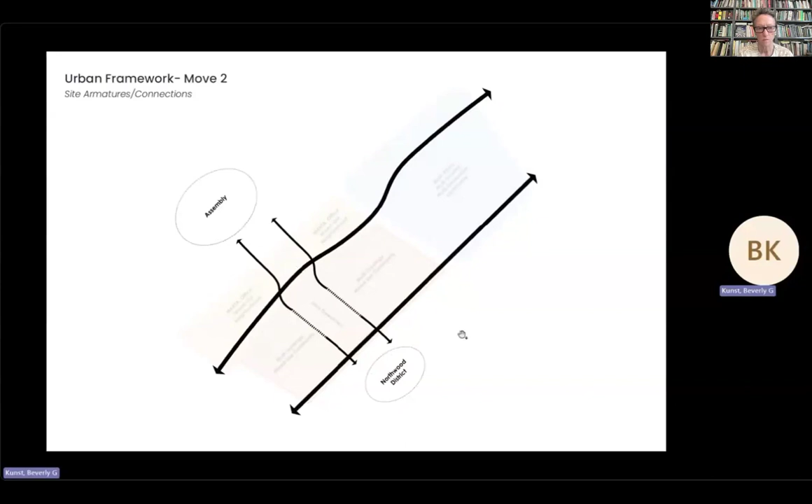The next things we began to look at were the two major roads running adjacent to or within our site: New Peachtree Road to the north and Buford Highway to the south. We're also looking at the connection between Assembly and the residential district towards the south side of the new downtown. The final thing we considered for climate change as an asset was water reclamation—looking at the natural high points of the site, the highest point in the metro Atlanta area, as well as New Peachtree Road being a ridge within the site creating water flow across our site.

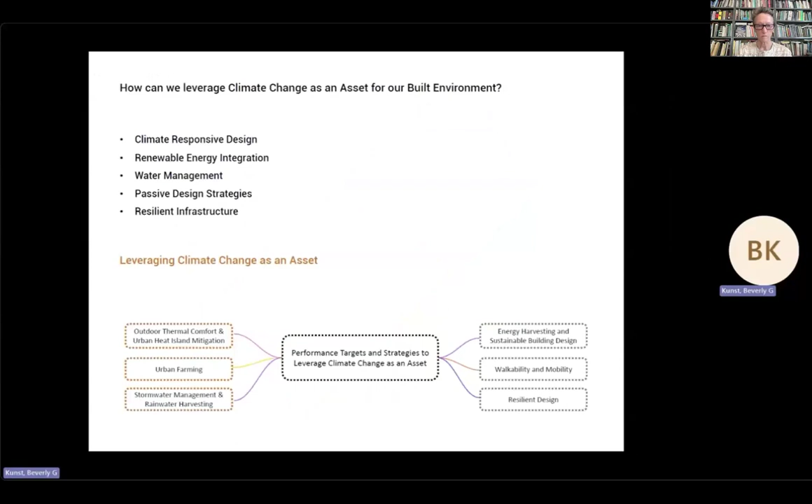Some key components we are looking at in utilizing climate change as an asset are how we can ensure outdoor thermal comfort and mitigate the urban heat island effect. We're also looking at how we can utilize urban farming, stormwater management, and rainwater harvesting.

Some ways we plan to implement these strategies are focusing on adaptation and mitigation. We are designing for the worst possible climate conditions in the next 25 years—so if we were to have a 100-year flood every 5 years, or very extreme temperatures in the summers and winters.

Some strategies we're looking at include urban farming on rooftops, specifically on Buford Highway Farmers Market, as well as on some of the other residential units in the design. We're also looking at harvesting water throughout the design, implementing tree and green-lined streets with bioswales that collect water runoff while also aiding the urban heat island effect and thermal comfort.

We're also proposing a district energy system that will fund different parts of the site through means of solar harvesting with photovoltaic panels and other energy sources.

This is a look at our illustrative master plan. The main things we want to illustrate here are the Buford Farmers Market, proposing a green roof there, connecting it to New Peachtree Road.

We are also looking at the water reclamation site based off of those water diagrams that we showed earlier. The final thing is implementing more water reclamation zones as well as solar infill zones within the courtyards of these spaces.

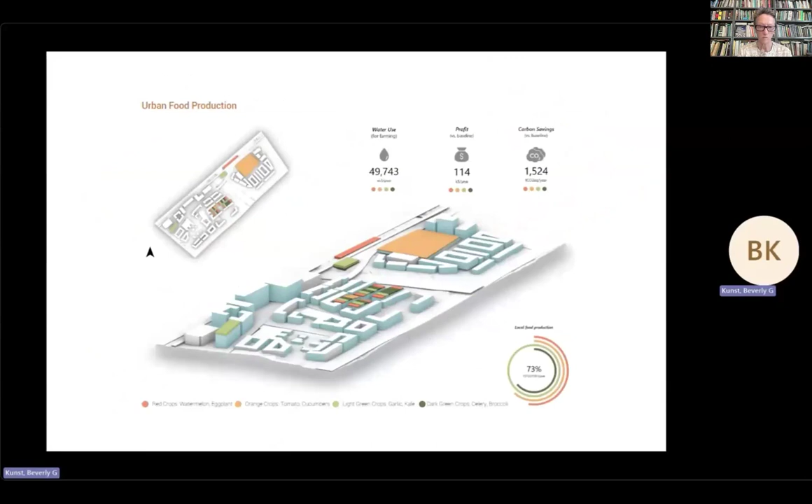So as we've been looking, if we do put a farm on top of Buford Highway Farmers Market, as you can see here in orange, we will be able to produce about 73% of the food needed for our development.

We also, if we can apply photovoltaic or solar panels on the tops of these blue hatched buildings, we'll be able to produce a lot of energy for our site, and with the urban farming, we'll be able to mitigate some of the heat gain in these areas.

We'll also be able to utilize these rooftop farms to collect rainwater from the tops of the buildings and use the rainwater, stormwater, and other water runoff as gray water, filter and reuse it in other parts of the site, maybe on the rooftop farms, or slow down the overflow in the event of floods.

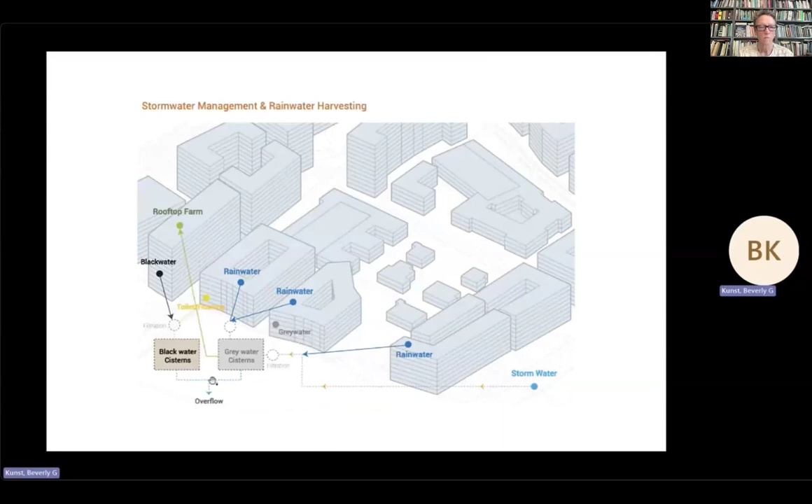Some of the live-work units we're hoping to propose—because we're trying to retain these ethnic businesses along Buford Highway, we're hoping to allow them to have rentable space on the bottom floor for their restaurant or other service, and residential space above.

And then we have some of the more typical residential scale buildings with residential on top and office retail on the bottom, and then a typical office building typology.

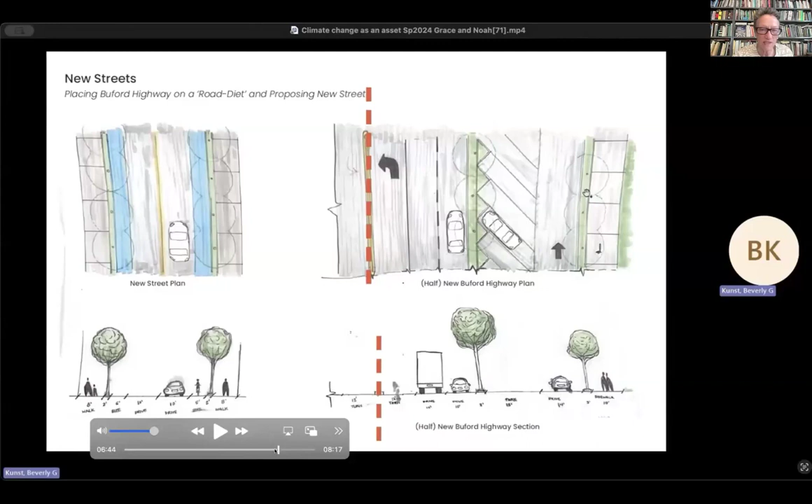I'm also wondering about this idea of building on top of the farmer's market roof. Any thoughts on that - putting a farm on the roof and the soccer field? There's a 20-foot drop from New Peachtree Road to the ground behind the farmer's market. So Noah and Grace are sure that they would still be able to have all the truck loading and everything happening underneath it, no problem.

I love the idea, but that was going to be my question - I forgot how much of a drop exactly that was, and if their loading would still be able to function like it does. But with that in mind, I do like that idea, because if you're walking on New Peachtree, it's like, oh, there's the farmer's market - how do I get there?

Question for rooftop farming is buildings to the east and west, and the sun, and their height - sometimes that kind of stifles growing. We'll have to check that.

There is also the weight issue - farming's heavy, dirt weighs a lot, soil's very heavy. But there are a lot of places that have rooftop farms now, so we'll have to just figure out how to do that.

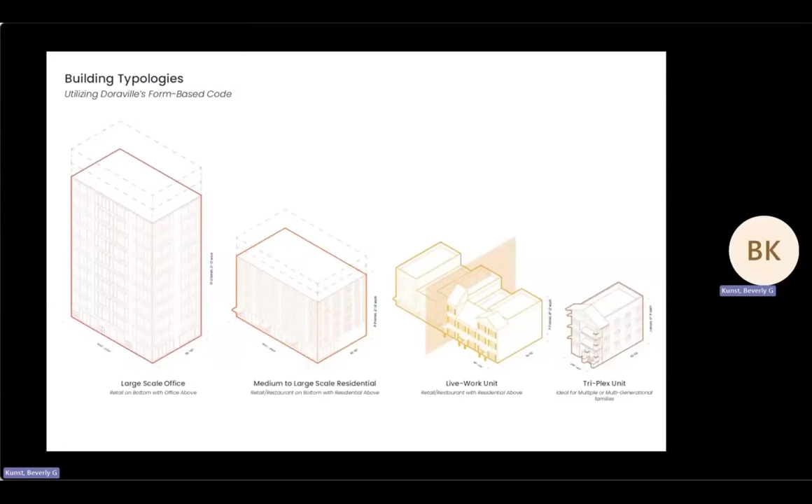I know. I mean, these are school projects. We are looking 25 years ahead, and nobody has a crystal ball. The economy could completely collapse, and we'd be lucky to be able to get just a couple of triplexes built. Who knows? But any other comments for Noah and Grace? If not, I'll open it up to general comments.

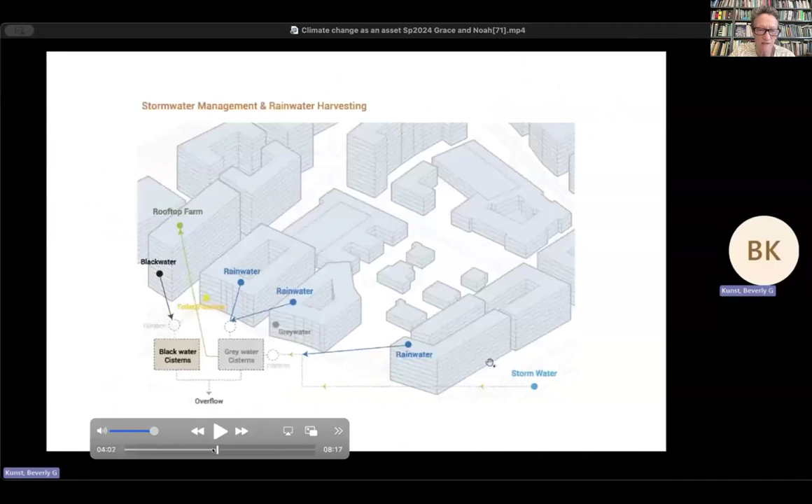I thought their MARTA section was also really quite, where is that? So I'm zooming through there. But just the views of Assembly would be fantastic, essentially above the MARTA, but on the MARTA land. Not to mention what Chris said when we were touring the site, that top penthouse would have a view of downtown Buckhead. So you would get the views of the whole area.

Yeah. All right, I'm going to stop sharing. Any closing comments, advice, as the students have about a month more to work? General observations? I think really thoughtful and creative ideas. Impressed by everything I saw.

And it's a very difficult problem to solve, but the challenge of separate property ownership, to me, as I've thought many years about the future of the corridor, is going to be a difficult one to solve. And if there are ways, going beyond just the planning level, things that the city or DeKalb County should explore as ways to help bring about change at a bigger level, I think that would be really important as you think through the future of all these different ideas. No, I totally agree.